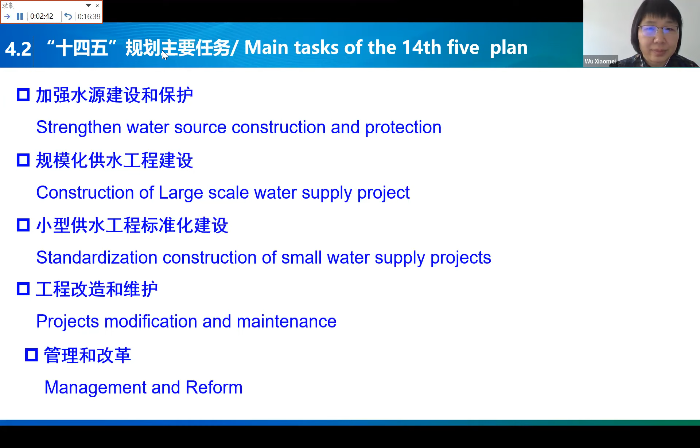Thank you very much, Ms. Wu Xiaomei. It is indeed impressive results you have made with supplying water to the rural population and reaching the SDG targets six years in advance. Very, very impressive.

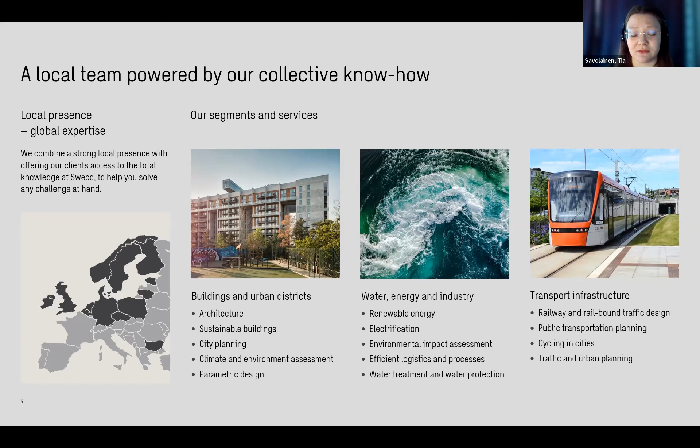Now about the white paper: it discusses the circular economy of small-scale water supply and sanitation in Europe. It identifies and highlights circular economy practices and technologies in use or under development.

Here is a map about rural areas in Europe. It's a bit old, but still the green color indicates rural areas. And as you can see, we have a lot of rural areas that need water supply and sanitation technologies here in Europe.

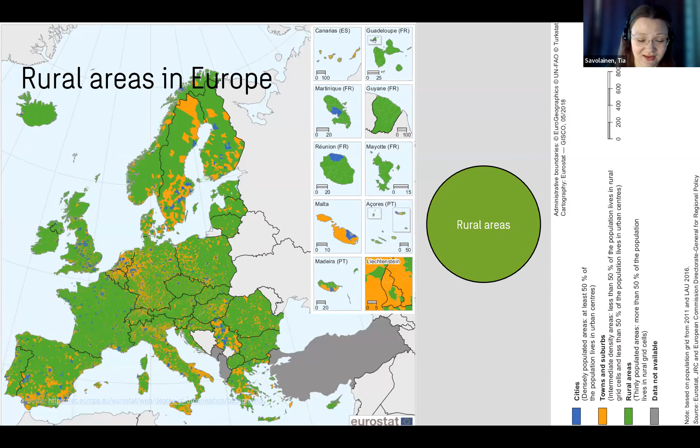The main focus in water supply and sanitation is to take advantage of the concept of circular economy. Instead of the linear take, make, and waste model, circular economy is circular and ongoing. Waste and usage of materials are reduced and then reused again after the materials are recycled to a new function. After that, the materials can be restored and recovered.

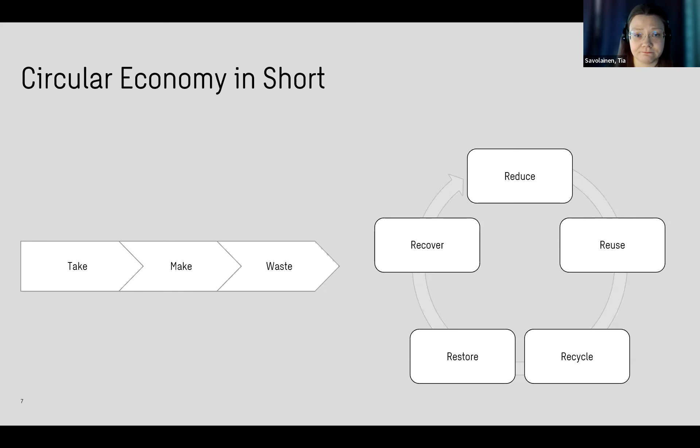Now a really short introduction to the history of water supply in rural Europe. It all began at the start of agriculture. During the Bronze Age, on modern day Crete and in the Indus Valley, there were already aqueducts, cisterns, and filtering systems, etc. Also, it has been common to use sludge as a fertilizer, however the usage has been hindered a bit because of legislation.

This chapter will discuss the drinking water production technologies in use in small-scale rural areas.

Usually the water supply is organized either with private wells or community or publicly managed supplies. Private or individual wells are point sources, such as boreholes, dug wells, springs, or rainwater collections, and they are piped into the dwelling or yard and serve a single family or a small number of households, like farms or hamlets. Mainly they are operated by the users themselves.

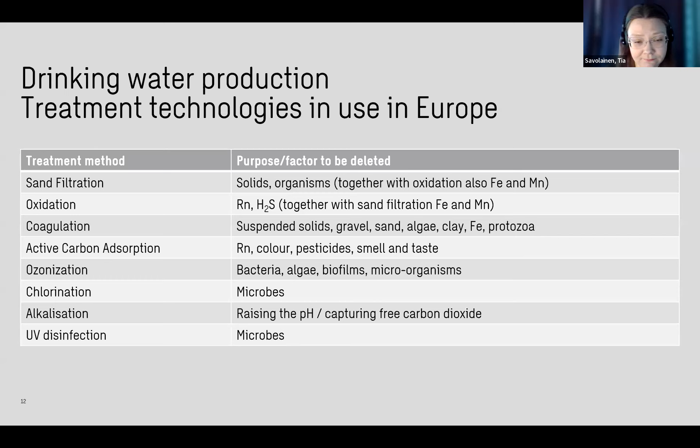So this was in short about drinking water, and now this chapter will discuss the sewage treatment technologies in use in small scale rural areas.

There are two types of wastewater: sewage can be separated into grey and black water. Grey water is domestic wastewater produced from laundry, shower, or hand basin water. Black water is sewage which also contains discharge from toilets, so it contains more organic loading than grey water.

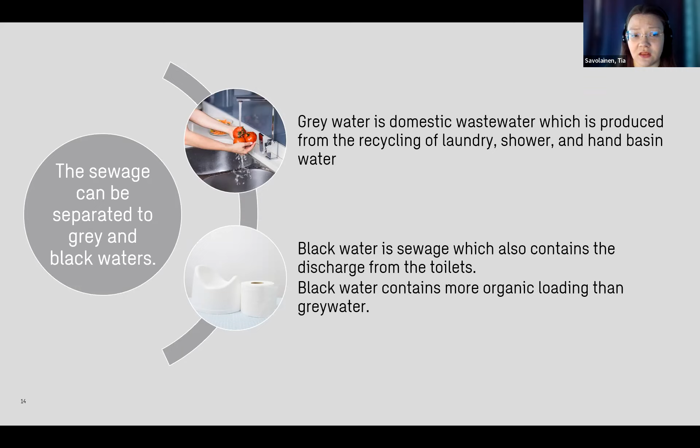Here are some of the treatment technologies in use in Europe. All small-scale treatment technologies have some sort of septic tank as a first stage of treatment, which separates solids and grease. Grey and black waters can both be treated with ground absorption and filtration.

These are both subsurface disposal systems, and the sewage is either absorbed or filtrated into the ground. In ground absorption, natural or artificial soil purifies the sewage, and the treated sewage ends up in the groundwater. In ground filtration, the treated sewage is collected and discarded to a water body. The ground treatment plant requires dephosphorization if it treats black waters.

Grey water can be processed in a seepage pit or with a filter. The seepage pit should be used only in specific cases, and only for small amounts of grey water. The grey water filter may use either a filter bag or a lime filter and sedimentation to remove impurities, and there are multiple different grey water filters on the market.

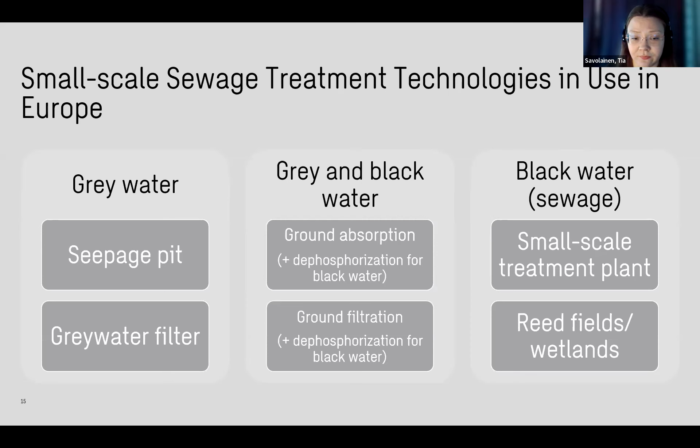Constructed reed fields or other wetlands are also a form of biological treatment. Here are pictures of reed fields or wetlands. You will hear more about them later today, but in reed fields or wetlands, the sewage is treated by bacteria, and the bacteria forms a biofilm on plant roots and clay granules.

To summarize, there are multiple different technologies to be utilized, and they are already on the market. About the white paper itself, it will be published on the CWP site later. Thank you, I'm Tia Savolainen, from Sweco and from Finland, and I thank you.

Thank you very much, Tia. Just one quick question: do you have an assessment of when the white paper will be available for download from the website? I think we agreed that we will send it to the center at the end of this month, and they will send it to you after this. Okay, so in a couple of weeks. Thank you very much, Tia, and looking forward to receiving the report and making it available.

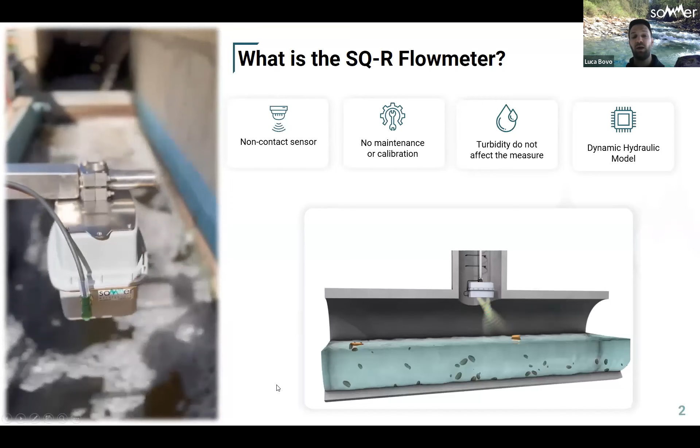So how it works: this sensor is a flow meter. As you can see, the sensor is outside of the water. Here's a small drawing and example. The big advantage of this non-contact technology, which we are kind of the promoter of, is really low maintenance and calibration, so after the installation you don't have any additional cost.

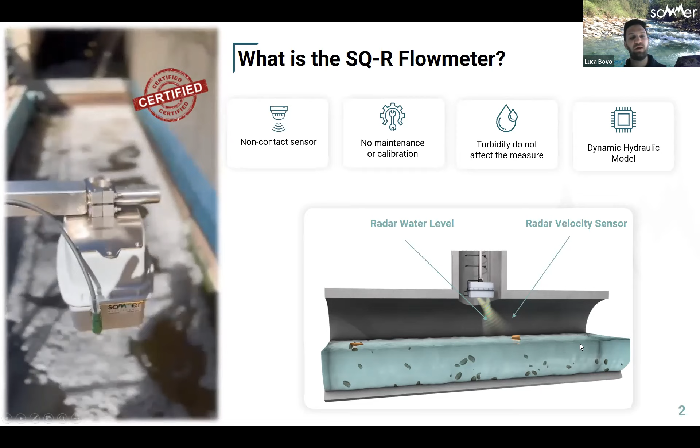But the other big plus that we propose is handling turbidity or whatever you have in the water. You can see here, I will play this video - there is some foam, but it could be even more. This is not affecting the measurement, okay? The sensor is equipped with two radars: a velocity sensor measuring the flux velocity, and the water level.

But the big plus of it is the advanced and dynamic hydraulic model that we developed almost 20 years ago - we started some applications in rivers. So you can imagine the hydraulic model is quite advanced, on board for the cross section. Thanks to this hydraulic model, we can calculate the correct mean velocity and the flux.

Of course, you need to configure the cross section, the profile, the material, but it's something really easy. Our software is a step-by-step software, and basically you don't need any specific technical skills to configure it. Thanks to this hydraulic model and the latest radar technology, we provide high water data reliability and quality.

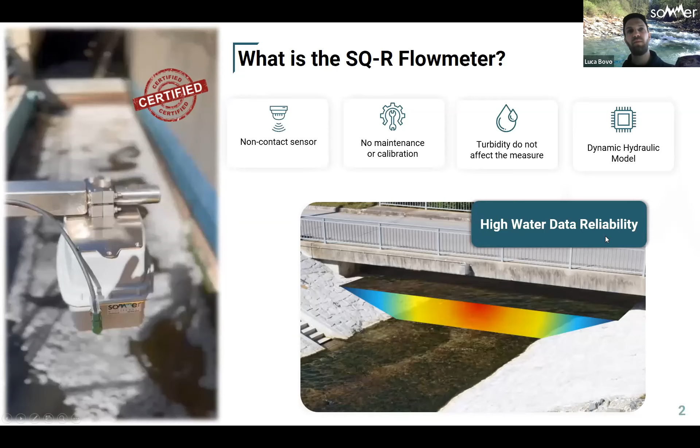Here's some picture, I like it. I think you can really see the sensor is outside, so it's protected. It's really fast and easy to install for you guys. Whatever you have here, the sensor can still work and assure you data.

There is no minimum flow required. There is no specific indication regarding the cross section. You can configure it trapezoid, rectangular, irregular. With a point-by-point configuration, you can set up an irregular cross section.

The sensor is really smart and has data quality indicators to validate the data and an automatic self-check. Also, especially in wastewater treatment plants or sewage systems, you can lack main electricity. The sensor has really low power consumption, so you can power it with a small battery, or even a solar panel.

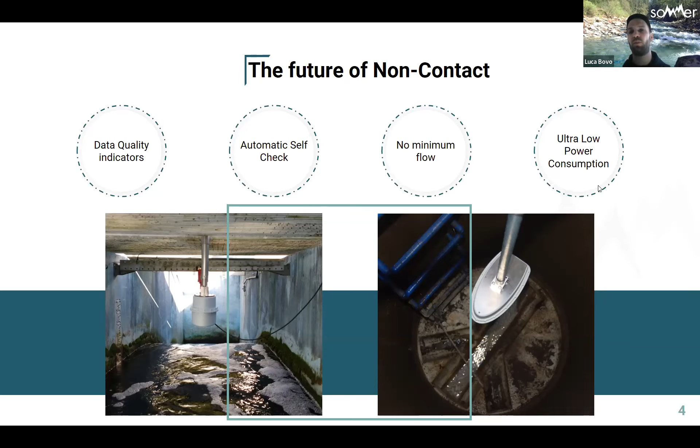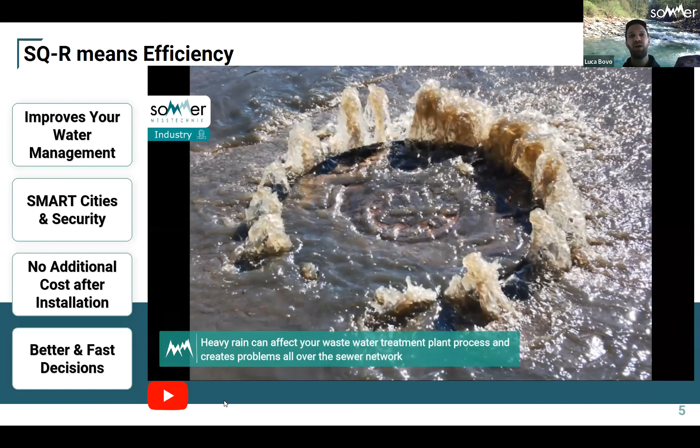I brought one video, we have one on our YouTube channel. It's quite interesting - this video is from Central America, where they are suffering heavy rain. Also in China or Asia, everywhere, we are facing heavy rain due to climate change, and this is of course affecting our sewage system and the wastewater treatment plant at the end.

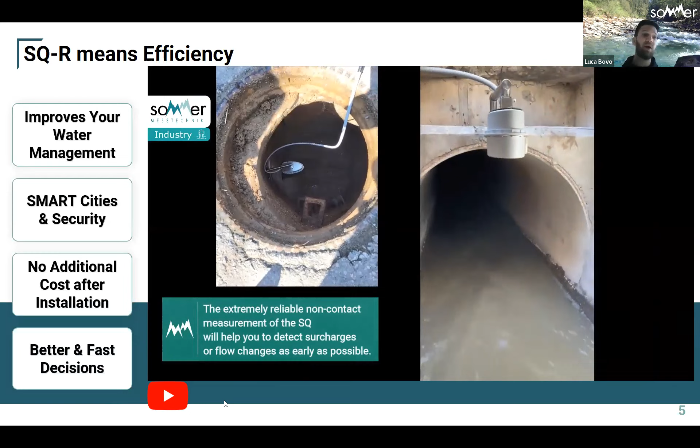So with this sensor, you basically can have online data and take better, faster decisions, and manage your sewage system and water treatment plant better.

There is no need for structural work. You just go there and in a few minutes, thanks to the design of the product - stainless steel, high quality - you can install a really small mast of support, and the sensor, that's it. In less than 30 minutes, you can go there, configure the sensor, and install it.

If you configure the sensor at home or at your office with your PC, because the configuration is made by PC, you can save a lot of time, and in just a few minutes you can install the sensor.

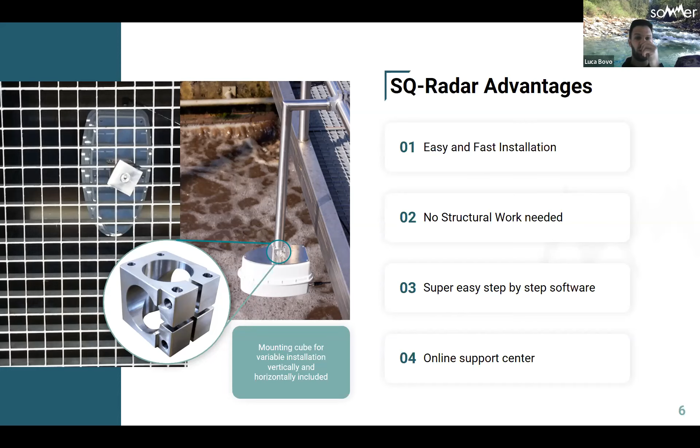The sensor is made with a specific plastic material, which allows us to install it in quite aggressive chemical situations - this is a picture from Hong Kong. It's not required to do any cleaning. The sensor can go under the water because it's IP68.

Thanks to our design, even when the sensor is going under the water, we are going to have air pockets, so again no cleaning is needed. You can see here it's pretty dirty, but the sensor is still working, and you don't need to go there and clean it or do any maintenance.

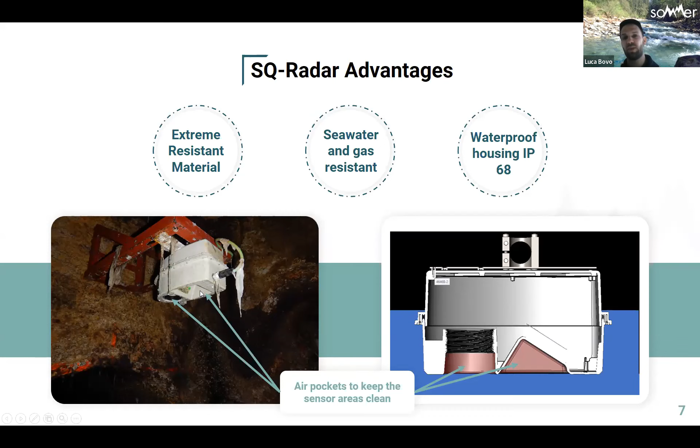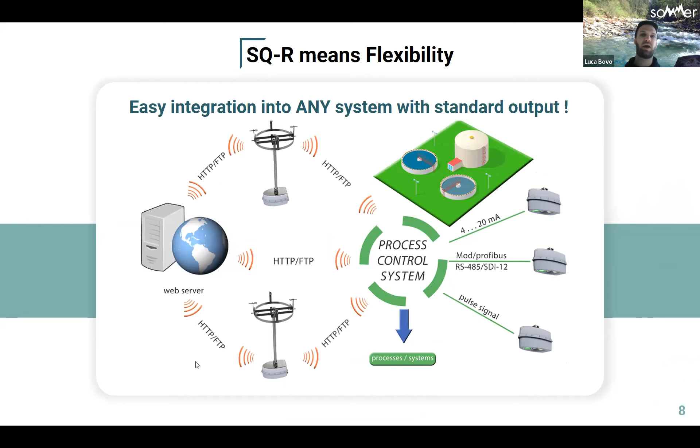The sensor also has a standard output, which means you can integrate it into your SCADA or your system, in your plants with no problem. We are using an analog and digital output, so you can do a lot of things.

One of our really cool applications and features, in my opinion, is if you want to monitor your sewage network - with this sensor, with this non-contact technology, your technicians don't need to go inside the sewage system. It could be quite dangerous, you need to wear masks and specific protection. But basically you go there, you can stay outside, and just lay down the sensor, and that's it.

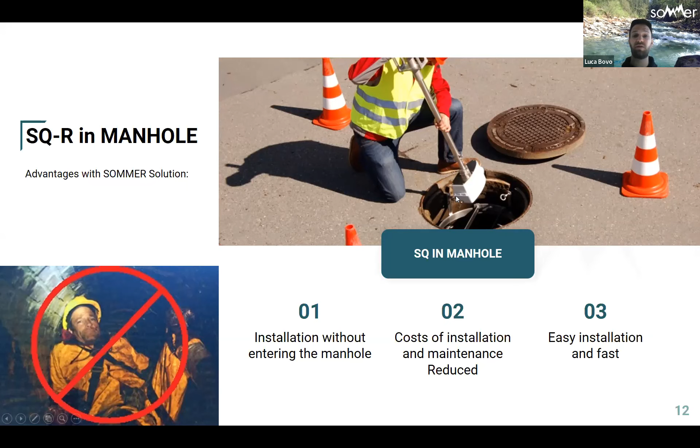Everything again could be powered by a small battery. Here's an example of a 22 ampere hour battery, and you can see you can have 10 weeks of power autonomy with data recording and also data transfer. Actually, the data transfer per day is the most power-consuming part. The sensor is down here, and you can combine it with simple data logging or data logging plus data transmission. Here's a good example from Korea.

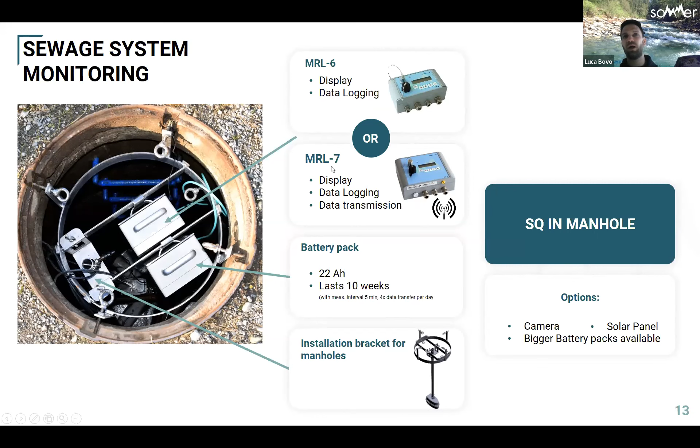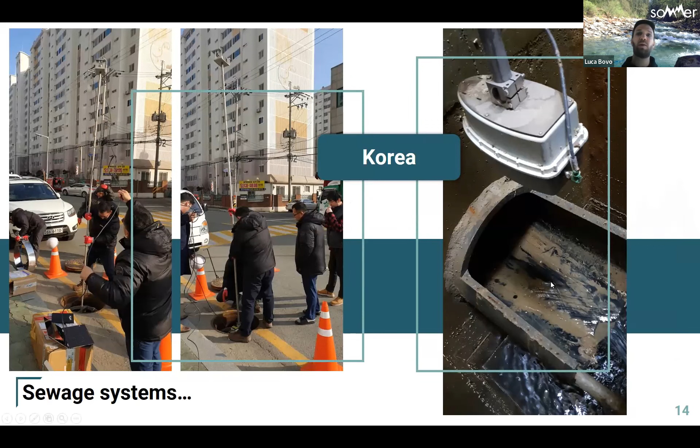What's really interesting, you can see here we're just talking about some liters per second, and a really small pipe. And for example, here in the US, you can see quite a high turbulent, high speed water, and we're talking about some cubic meters per second, compared to this other storm water pipe, where it's really calm.

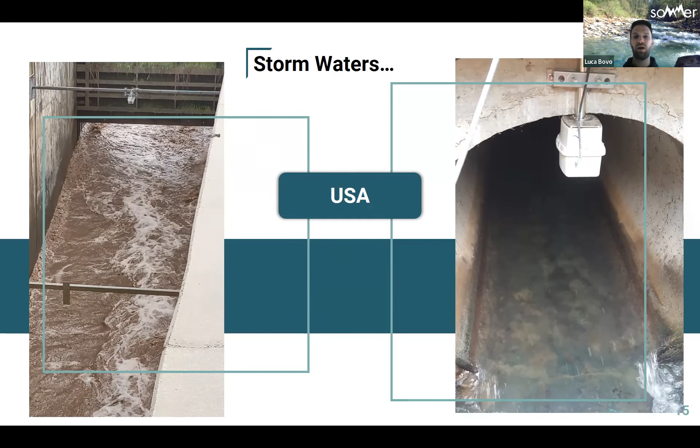So how is this possible? This is possible due to our hydraulic model, which is dynamic, based on the condition. The sensor is really smart, and can recognize what type of situation you have at each water level and velocity it's measuring.

So basically you can install the sensor not only in pipes but also in open channels. You could also have an industrial application, for example a hydroelectric plant, so we can measure whatever fluid you have in your process. It could be irrigation channels, since we don't have any limitation in channel size or flow in terms of minimum or maximum.

And one minute, Luca. Yeah, one minute, I'm almost done. Don't worry, Henrik. And I want to repeat again, the cross section could be irregular.

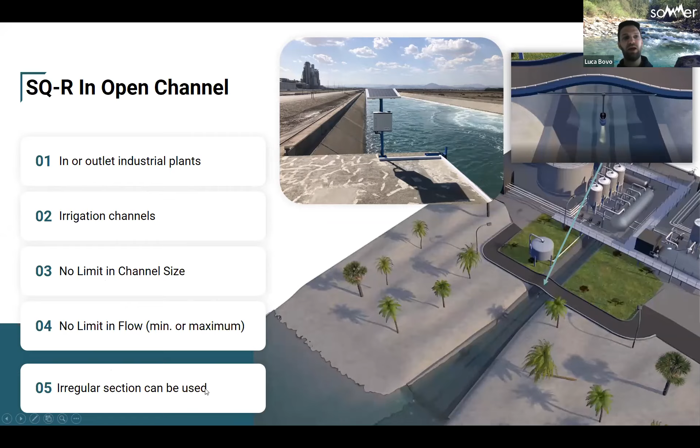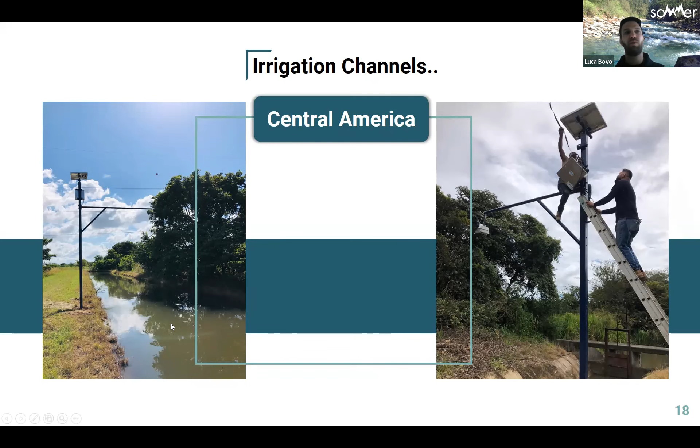Just my last slide here. This is an example of irrigation channels where they want to have automation, with gates and everything, to better control water distribution. You can see the sensor is outside, again powered with battery and solar panel, and it's safe here, no animal can damage it. There was a problem with alligators and other animals eating cables and eating the sensor. So whatever condition you have here, the sensor can measure it and is safe from animals and even vandalism.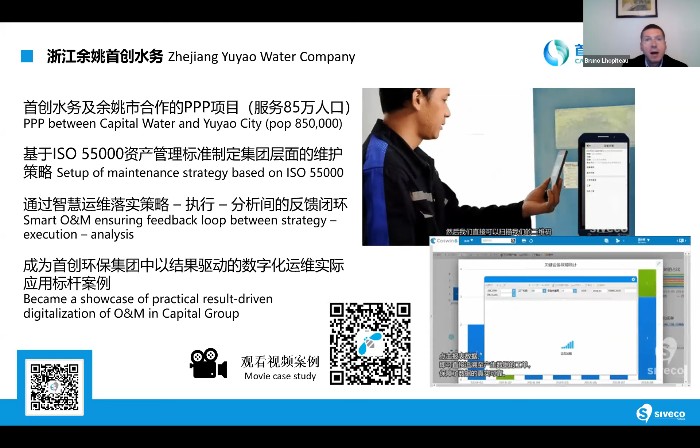And that's another example, I think, of what can be achieved with relatively small water companies. These projects are all based on our smart O&M solutions, which have been used in many other environmental companies throughout China and elsewhere in the world. I won't say too much about this.

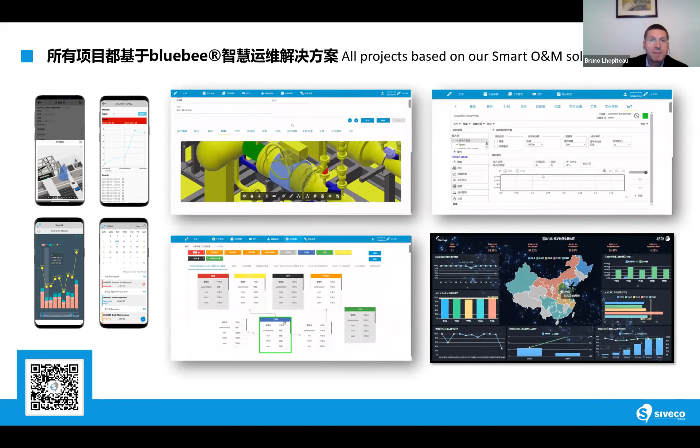One thing I want to say is in the water industry, and you have seen it in other presentations and in many of your companies, there's many different software solutions used and many different software suppliers. Quite often the water company themselves have an IT subsidiary. So we need to be able to cooperate with other system suppliers.

And that's very much what we do with our solutions, which are designed to integrate within a smart water platform with other solutions, with a digital twin, with IoT software, with an ERP, with a GIS, with a BIM model. And of course, not only can we do it, but we're happy to and we have to cooperate with existing IT suppliers.

So I conclude with what I call lessons learned from these two case studies, but more generally from our long experience in the market.

As I expressed in the case studies, having a more industrial approach rather than software development achieves much better results. This is why my company has been hired as a consultant for many large Chinese water companies that have their own IT subsidiary, or have big IT suppliers working with them, and we are able to work together to deliver results.

Our smart O&M solution can complement a much more general digital twin or smart water solution that seems to do everything, but actually is mostly just beautiful screens and getting data from sensors. So we have learned to cooperate in that environment.

Finally, our experience working with small and medium-sized water companies - I gave you two examples, we have many others - shows that these companies present many advantages. They have much less constraints from the group or corporate, simply because usually they don't have a corporate headquarters. They are not part of a big group, or in the examples I mentioned, they are joint ventures, so they are not dependent on the group. They can make their own decisions.

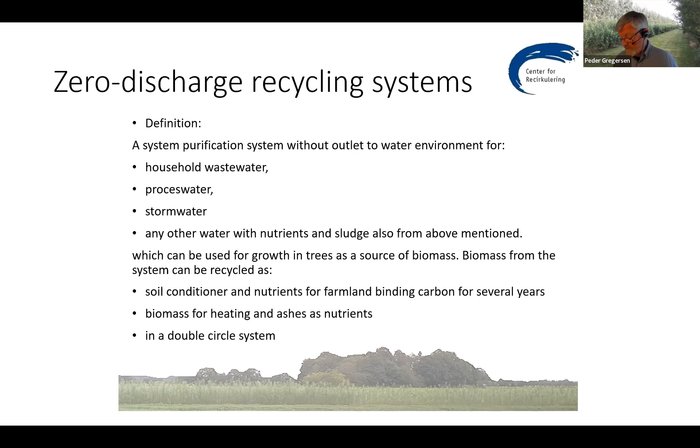We are using it into a double circle system. I'll show you what it is, but first I'll just remind you what this zero discharge is about. It's possible for us, because we have developed the principle, to calculate how much wastewater we can put into a system with trees, because these trees have evapotranspiration through the leaves.

The water goes to the air. Then you also have some precipitation, and you have to keep a balance between wastewater, precipitation, and the evapotranspiration. This is not the same all year round, but during the summer, we have removed so much water from the soil that there'll be room as storage during the winter.

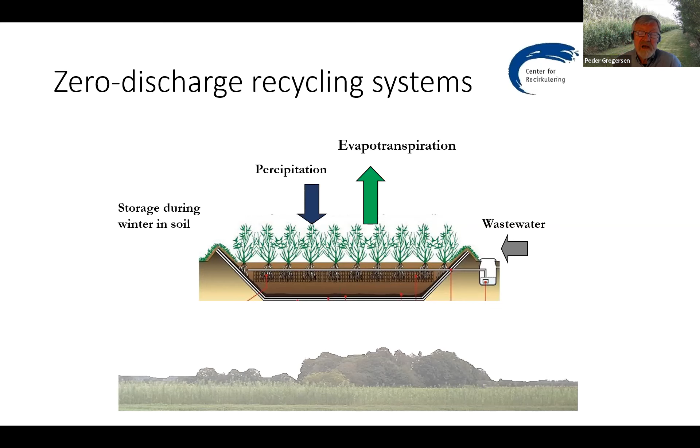Remember, this is trees. It's trees that are growing, and they are producing. And they are producing because they uptake nutrients through the stems and leaves. Some of the leaves fall down again. Some nutrients, especially nitrogen, come from the atmosphere. And we have some wastewater coming into this system. Now we are uptaking these, we are using them. If you use them, they don't make mess anywhere else.

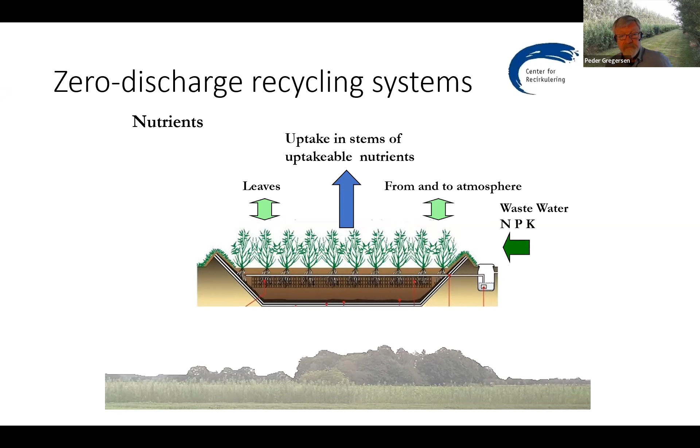Now for the double circle system.

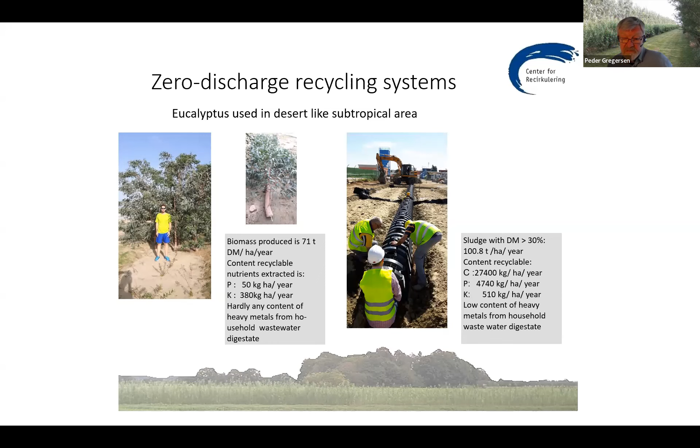So the sludge comes out also. This contains a carbon amount of 27,400 kilos per hectare per year. Phosphorus also very much, and potassium the same. So actually, this is a really, really good system with special benefits. It can be used for fighting desertification because it brings organic matter to the soil.

The biomass from the trees is used for soil conditioner and fertilizer for a new area. The biomass from sludge is also used for soil conditioner and fertilization. Assimilation in the trees converts carbon dioxide from the atmosphere to oxygen and to biomass.

All areas with trees create biodiversity and reduce wind speed, so it's a start of a new forest agriculture. In addition, your water environment will be totally clean and for free. We are also able to make this system in a way that you can take water out.

All it takes is sunlight, wastewater, some area, often wasted land, and a small pump to distribute the wastewater, including the sludge. And that means it will meet all these demands, which is for the future of using very little energy.

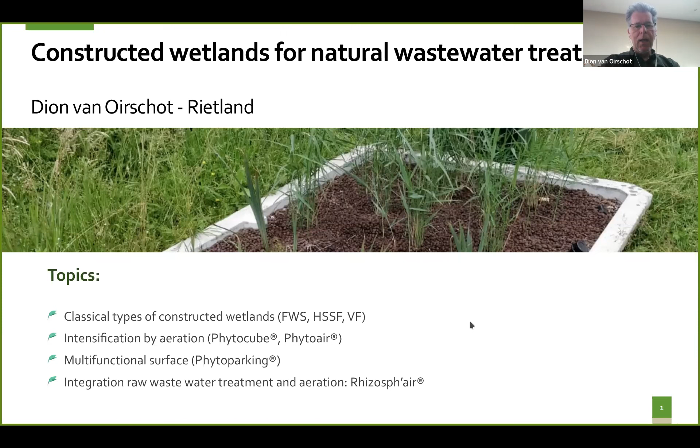I will first start with some explanation about constructed wetlands. Constructed wetlands are basically natural treatment systems that mimic processes that also occur in nature. If you discharge wastewater into a small river which has plants in it, then the wastewater will be cleaner at the end of the river, because the microorganisms living on the plant stems and in the soil below the river will play a role in cleaning the wastewater.

But of course, the amount of wastewater has increased a lot during the last hundreds of years, so the capacity for natural systems to treat the wastewater has been exhausted. So we need to clean the wastewater now before discharging it into rivers. What we do with constructed wetlands is mimic the processes that occur in nature, but we intensify them on a smaller surface area. That's basically what we do.

So here you see the three classical types of constructed wetlands. On the left, you see the free water surface wetland, where the wastewater streams between the plant stems. The plants are, most times, reeds.

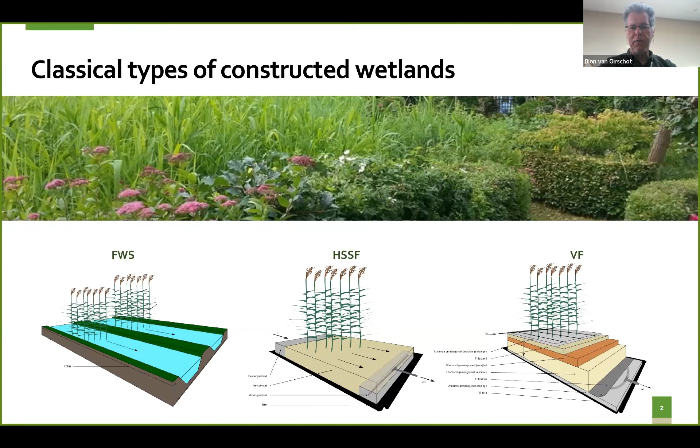So what we have been doing together with our partner in the United States, Naturally Wallace Consulting, is they developed a system where these natural treatment systems, the wetlands, are enhanced with aeration. So now we have 3 different types of aerated systems. The classical aerated wetland that you see on the left, we call it Phytoair.

We developed a new system that we also patented, where there are no reeds any longer, but grass tiles that you can also use as a parking. That's called a phytoparking. Then we have the really small system for single households—a prefab system in a concrete basin called the Phyto Cube. So that's the Phyto series that we developed for the European market in the beginning.

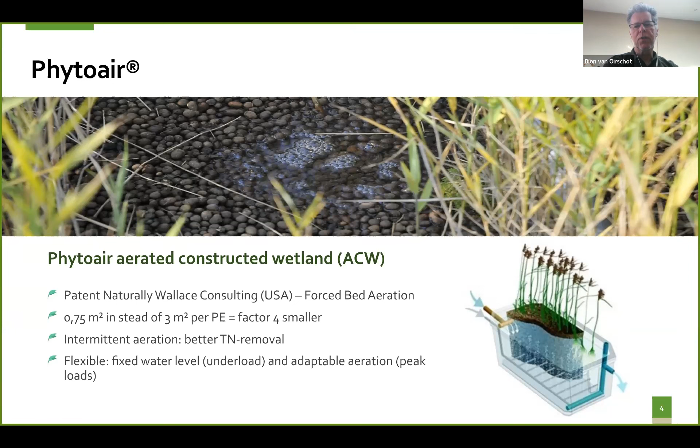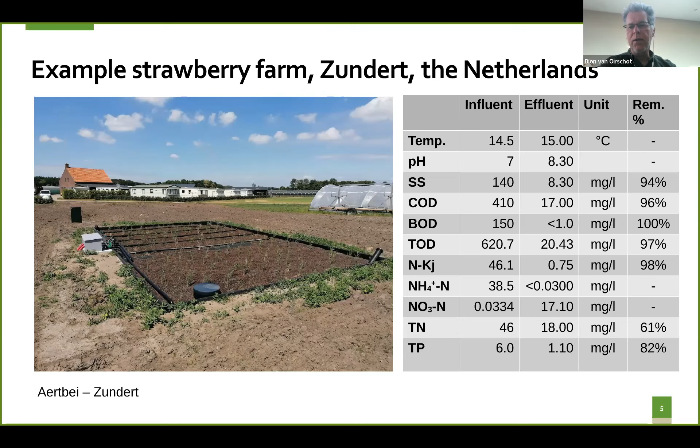96% respectively, and also the organic nitrogen is removed for 98%, and the total nitrogen for 60%, and that is quite high for a wetland and even for a technical wastewater treatment system, because these results are comparable to what you can reach in large scale wastewater treatment systems.

Okay, besides an example from the Netherlands, I wanted to show you an example that we constructed in China. Well, we didn't actually construct it - it was our partner Deihua Aquatech in Suzhou. They constructed the system, and we did the design for this.

One minute, Dion. Okay, thank you.

So the last slide I wanted to show you is about a new system that we have patented together with Naturally Wallace and our French partner Syntea.

Most wetland systems work with a pre-treatment, septic tank, or some pre-settlement system. But especially if you go for larger systems, these septic tanks can become very large. Also, if you pre-treat wastewater in a septic tank, which is an anaerobic system, it will produce methane, and methane is a very strong greenhouse gas, as most of you will know.